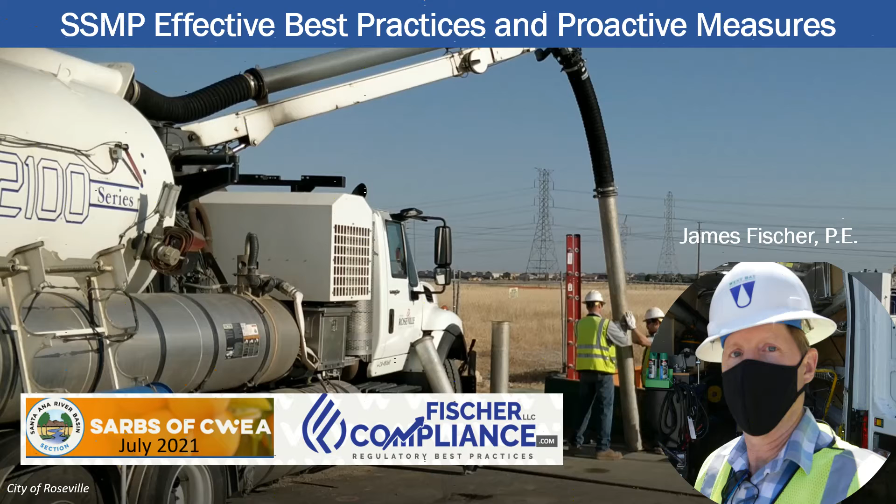Today I'm going to present to the Santa Ana River Basin—very pleased to present here—some best practices and proactive measures for SSMP and sewer program success.

Starting off with a couple of questions: How well do you think your SSMP complies with the WDRs, on a scale from 1 to 5? Something to ponder. While we're going through here, how effective do you think your SSMP is at reducing SSOs, on a scale from 0 to 5?

And last, if inspectors arrive tomorrow from the EPA, water boards, or even an NGO, how successful do you think you'd be, on a scale from 0 to 5?

These are good ones to think about during this presentation, including maybe some areas you might want to look at again later to refine your program.

Here are the main topics I'm going to discuss today in the video, starting with audits and enforcement—just a background review of some of the information the water boards is using right now to stay on top of the latest tips.

Numbers 2 and 3 are tips on evaluating effectiveness and resiliency for the proposed new staff informal draft that's out right now for the WDRs.

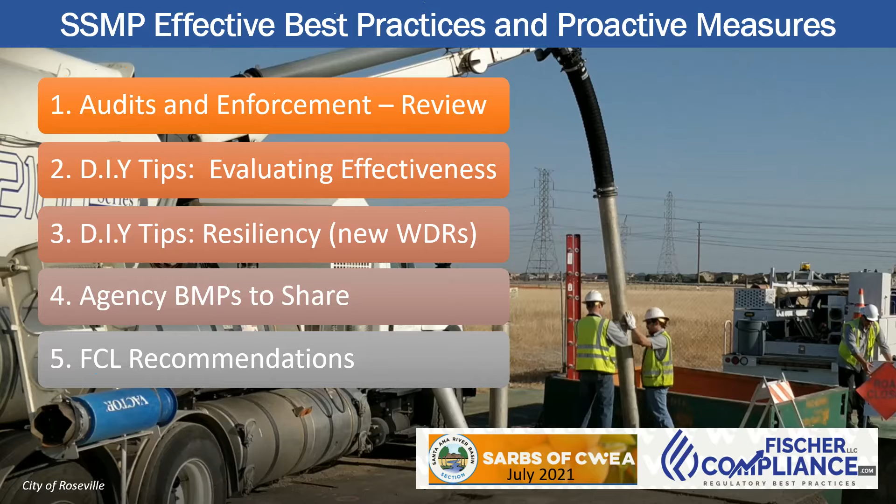Number 4, some BMPs—best management practices—to share from other agencies. And finally, at the end, recommendations on audits.

So just a background review: audits have been going around for a long time. The water boards do inspections and audits—they kind of call them the same thing, not to be confused with the SSMP internal audit that's done either by yourselves or by an outside party or another agency.

So you'll hear that term, audits and inspections, used interchangeably by the water boards.

One of the important areas that's always recommended is the water quality enforcement policy. I'm going to walk through a couple case scenarios here, but just kind of knowing the policy, knowing what the authority is for the water boards.

You definitely want to be on the left if you're going to have any enforcement—verbal warning, enforcement letter, or NOV. Those are all fine compared to the ones on the right, which are basically the formal actions.

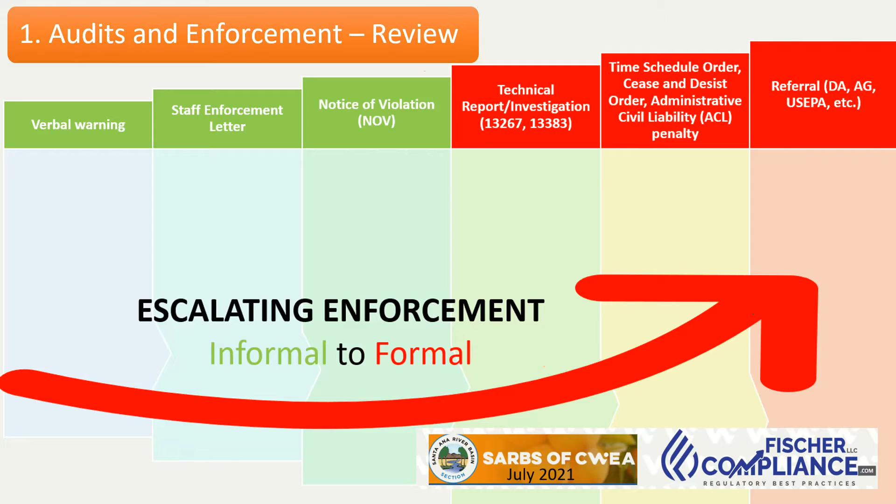I'm going to go through some of the formal actions here, the administrative civil liability actions, including the calculation or estimation for the economic benefit. This is an area that a lot of the people I've been talking with lately don't understand very well.

It's really worth going and looking at some examples. I've got a couple here in the presentation today to show some of the latest examples from Southern California and the San Diego region.

Economic benefit shall be estimated for every violation, okay? This is for every violation and any penalty action, and it's any savings or monetary gain derived from the act or omission that constitutes the violation.

So in other words, if there was a violation—was there any postponement, delay of the pump station upgrades, the treatment system that failed to do adequate control measures, such as having a good SSMP that can reduce spills? What could have and should have been done ahead of time? Were the audits not done?

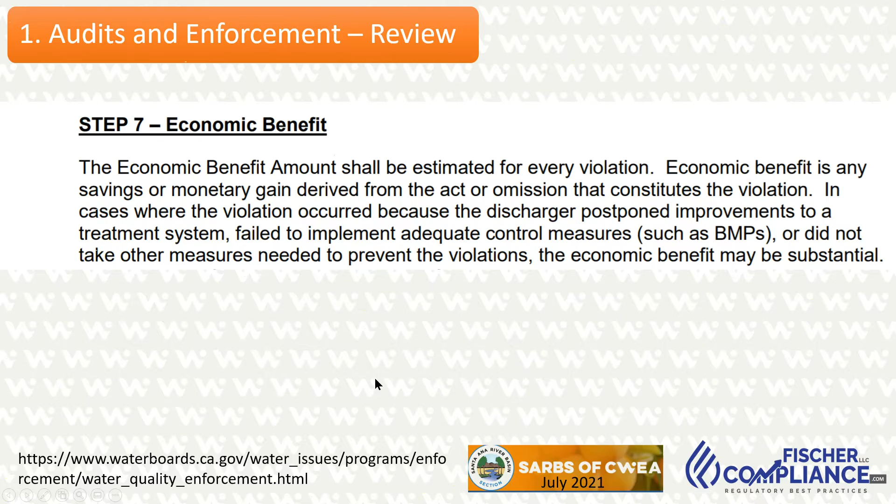Those are all things that economic benefit can be derived from, that would be entered into the calculation. So I'll show that here in a minute.

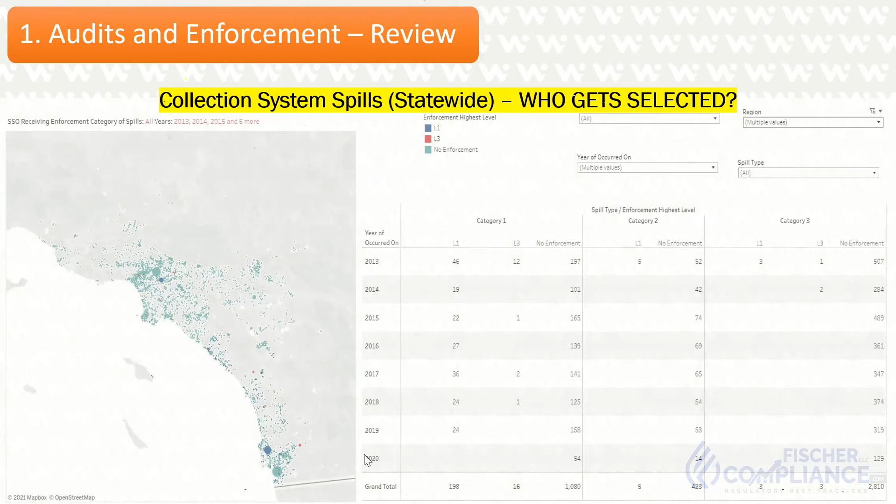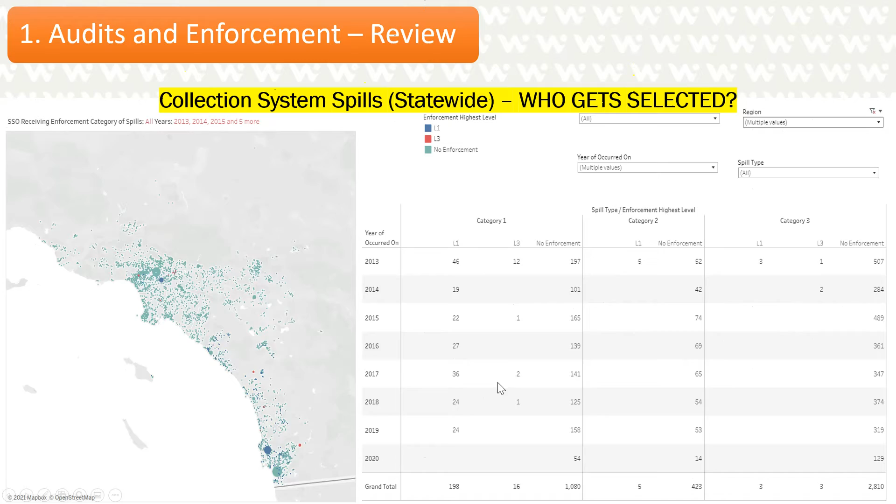And then who gets selected here? It's Southern California. This is really good to show where the historic enforcement actions have been done for the different violation categories, and a map showing where those violations are here in Southern California.

So those are just something to be aware of—there are tools the boards have developed, and there are other tools they're developing. There's also a really good recommendation here, I think, to be aware of your enforcement page in your regional board, depending upon where you are.

The San Diego board here, I'll show a couple of examples of what's posted on their page for adopted administrative civil liability, ACL, penalty actions that they've taken, starting with one from the city of Laguna Beach, $1.5 million. This is just a few weeks back.

More importantly, what's really important about these is to review the documents that are considered, what are they looking at - their questionnaire, the spill data that's in CIWQS, any kind of response to an NOV or a 13267 water quality order, a technical investigation.

Again, this is a big penalty action, but the more important thing here to look at is what could have maybe been looked at beforehand, and more importantly, how does the water boards view these actions? So economic benefit played a major role here in this enforcement action, with $257,000 added to the penalty because the prosecution team believed there was avoided cost of bypassing this force main system, which could have been done under non-emergency conditions.

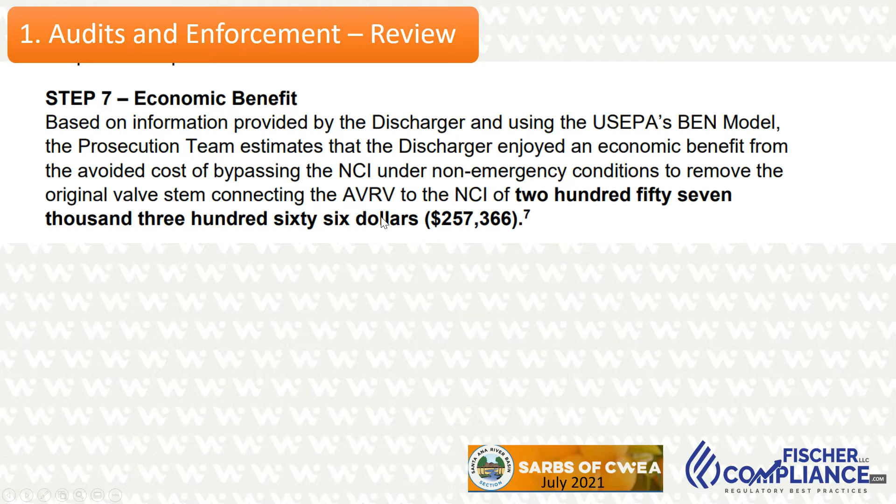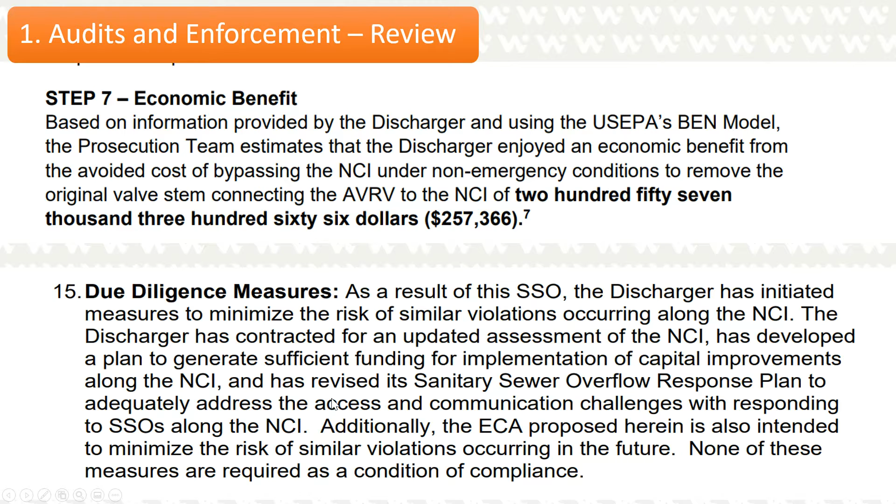The other great thing here is that the city of Laguna Beach should be really commended for initiating some major measures in the city to minimize future risks along that force main. Again, ahead of time is better, but if it's done after the fact, this needs to be pointed out, especially if it's in the SSMP and relied on for mitigating SSOs that have happened in the past.

Another one, the city of San Diego. This is another big one that happened a few years back. Again, more importantly here, not the penalty, but what the board relied on.

So something to be aware of: if your SSMP is not ready for scrutiny, it's not ready for another set of eyes, get it ready. I'll have some more tips here to show you how to do that, starting here.

The compliance reporting for notification, SSOs, are the 3-day draft, the 15-day certification, the questionnaire annual compliance, the audits - are those all being done on time? Because the reporting and all this will be looked at in fine detail during an inspection or during an enforcement action. Large SSO monitoring - is that program ready to go?

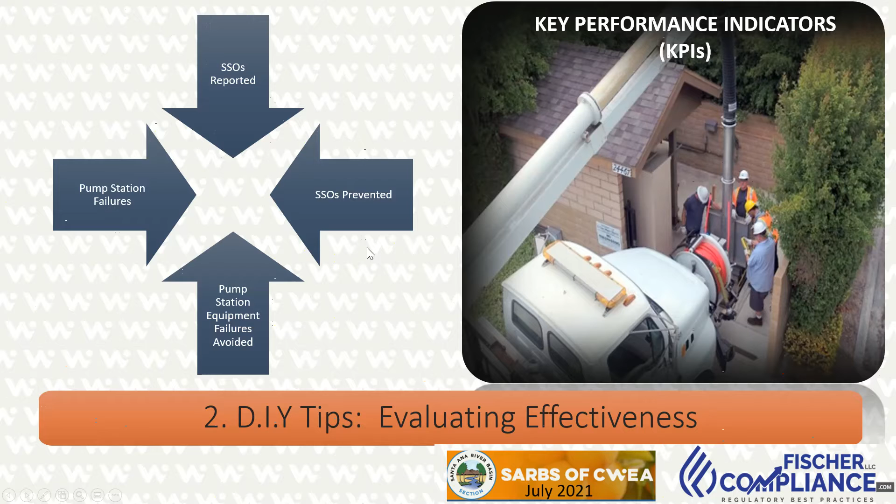Another one here, key performance indicators - these can be added into your actual SSMP. I'll show an example real quickly from the South Placer Municipal Utility District that actually does this for every one of their elements. This is D13.4, provision D13, number 4 in their SSMP.

They talk about what they're doing here in their O&M program. But you can see here they have the key performance indicators for many of these items, not every one - but are these all in place?

Are the systems in place to schedule and do the documented activities, work orders, the R&R program, the contractors being trained? Does your CIP address O&M?

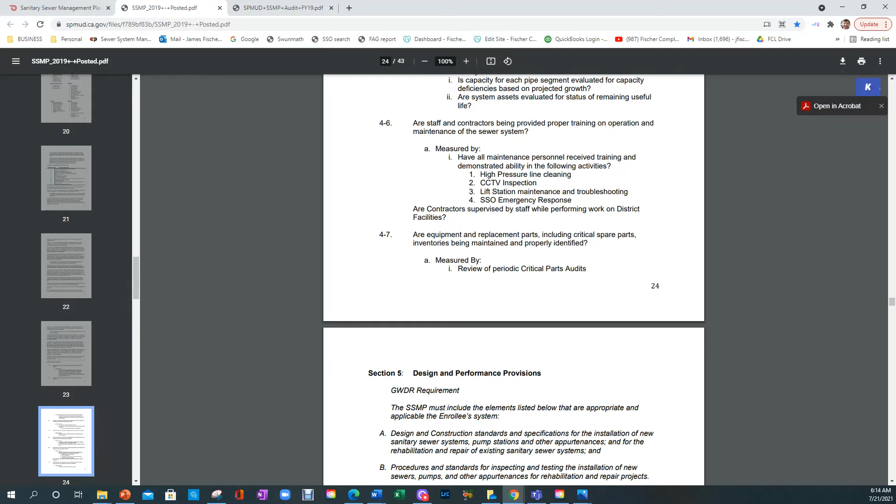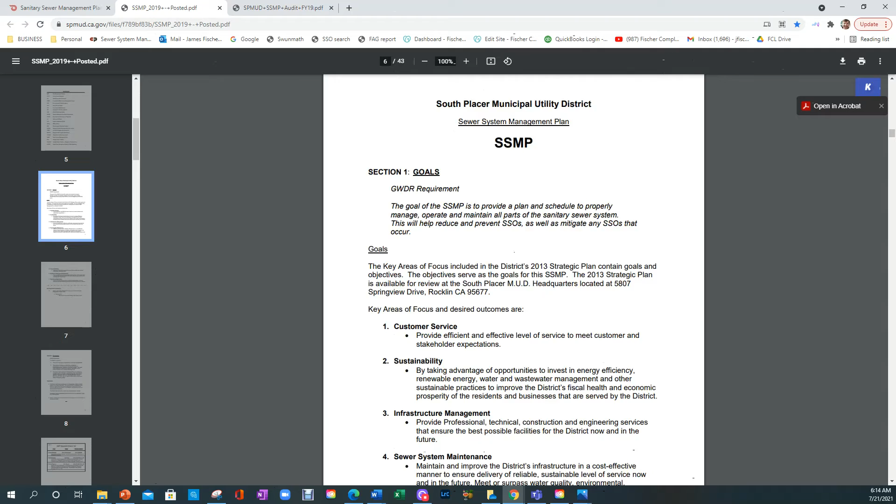They're constantly monitoring how effective they're doing for every element, even going up to the goals. I'll scroll up to the top here. Very impressive. The goals, it's easy to say, yeah, we want to prevent spills. Everybody says that, and have a good level of service, but are they really being implemented?

So the organization, again, key performance indicators shown in their plan, scroll down here, are all these things being updated? Is the chart current? So this is all great stuff to be monitoring during your cycles of your audits or your SSMP updates, so you can keep your finger on the pulse all the way through here.

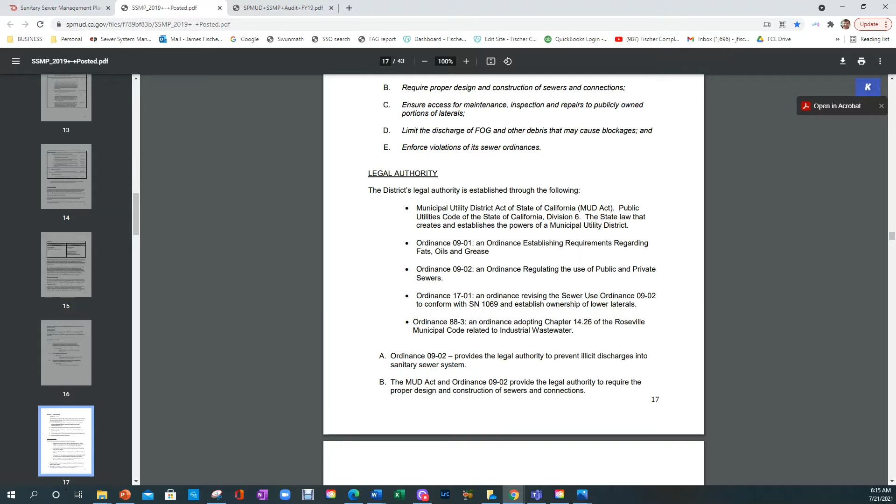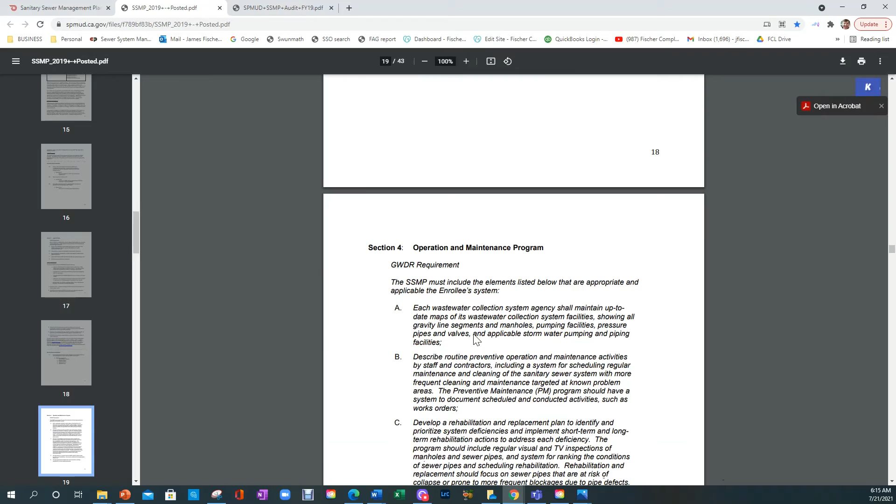And so these are really important. They're changing their ordinances. They're making pertinent ordinance reviews and updates here that are being tracked. So this is something you can definitely do for every one of the elements, something that we're recommending when we're looking at SSMPs or SSMP audits during these work activities. So just point those out real quick.

Again, these things, the boards are going to look at things like SSOs prevented, pump stations, had the grade alarms, they worked. We had the level sensors, we had flow monitoring, we had other measures, cameras, whatever, that avoided spills. These are things to definitely track if you aren't already.

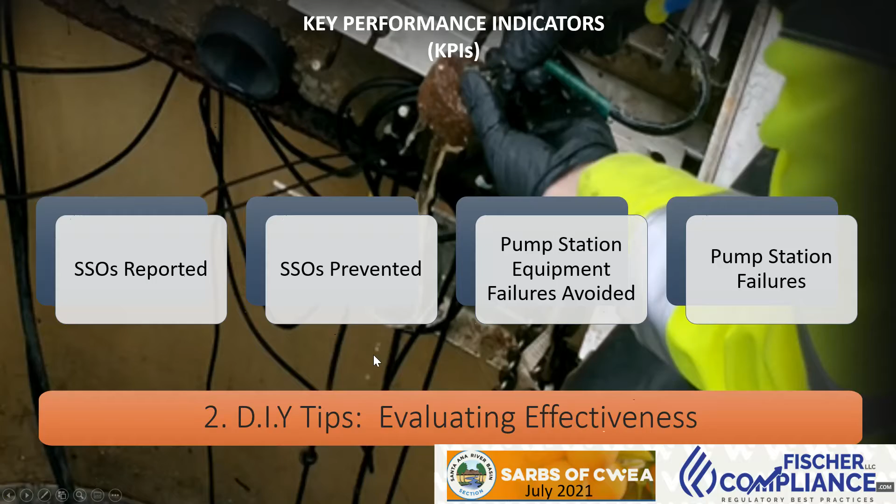I find a lot of agencies are not tracking this. They might just be tracking the failures, and that's negative. You want to see the positive things, and certainly the things highlighted here, and present that to anybody that asks, or even just have that in your SSMP.

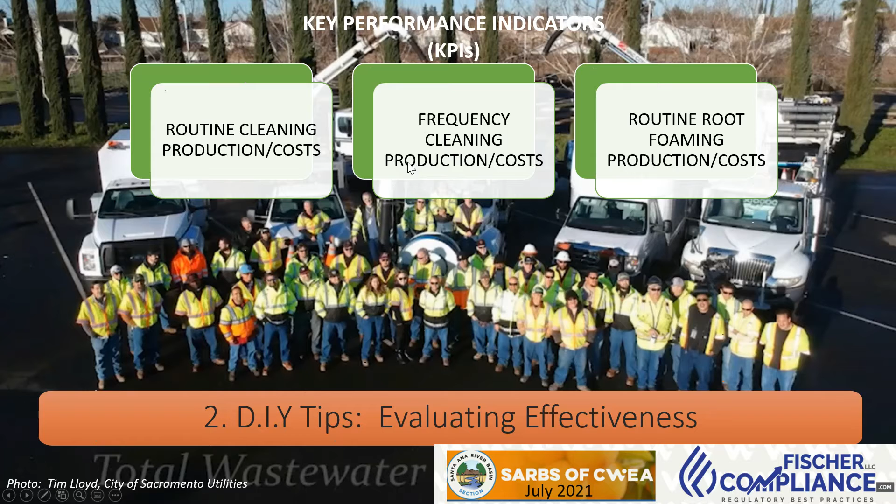Routine cleaning, your high frequency cleaning, your root foaming. Are these costs and productions, are you getting credit for these? These are definitely areas you can do for improving your effectiveness.

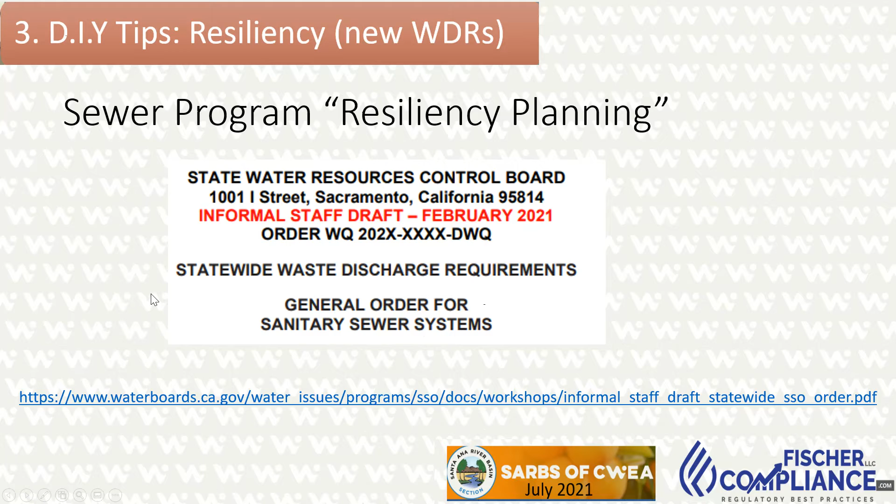Moving into some tips on resiliency, the staff informal draft has been released. I'm sure many of you have seen it. It's a huge 80-some page document. Again, this is draft, this is not in place yet, so there's a lot of comments going on right now on this. I was just going to point out a couple of things that I thought of for the presentation for SARBs today, for things related to resiliency planning.

And there's very specific things in here right now that may or may not be included. We don't know, so I'm not going to point out the ones that are in here because these are, again, not required. At the board, the State Water Board is the only one that can adopt this, and this is simply being circulated for comments. So at this point, there's been nothing formal released yet.

So I'm just going to point out resiliency measures here for reducing risk, for reducing spills, that should already be in place if you have a good program. Right here, I'll run through these pretty quickly. If you want to go back and look later, that's great.

But do you know the most likely location for your next SSOs? Are you collecting data on how you might be impacted by climate? A lot of agencies are not, but you might want to start doing that, because this is definitely an area that will be hammered on for sure in the future, and the water boards have made that very clear.

Predictive monitoring. If you have failures, or you don't even have failures, or you haven't maybe done a lot of condition assessment in your force mains or other parts of your gravity systems, are you doing any predictive monitoring? Are you checking temperatures on pumps or bearing temperatures, or motor temperatures? Any kind of predictive monitoring for oil in pumps or motors to make sure that you don't fail. Any kind of predictive monitoring, pressures, flows.

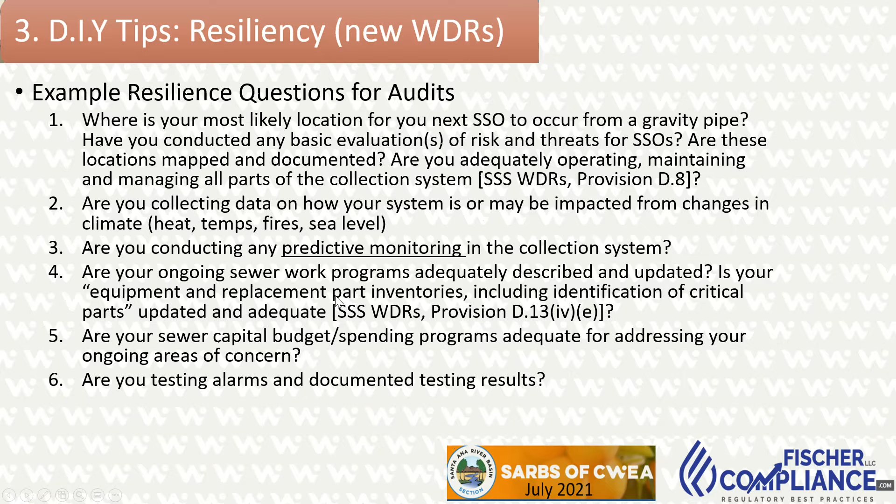Work programs are being reviewed, capital budgets, alarms are being tested. A few more: mutual assistance agreements. This is really big. I know for the regions in Southern California, are these in place? Are you having your SSMP, your audits, peer reviewed? Are they being done on time? Do you have change logs you can demonstrate that you're actually implementing, to show to inspectors?

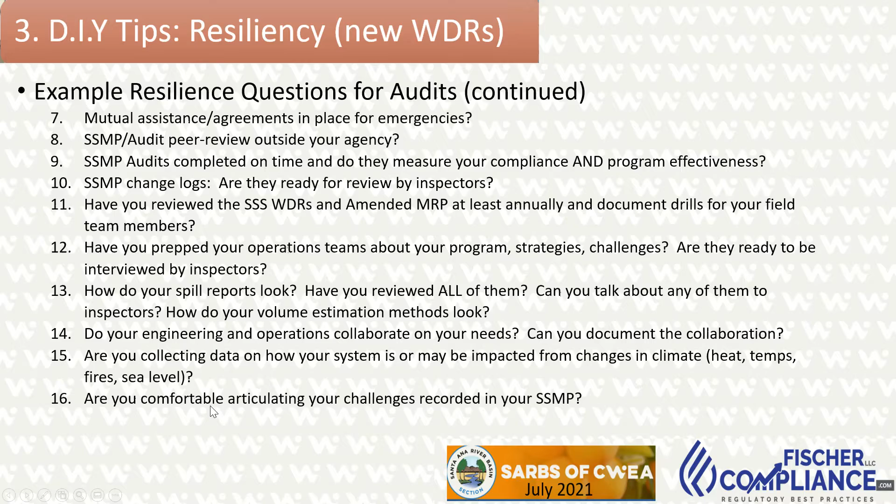Reviewing the MRP—this goes on and on, so I'm just going to quickly browse through here, maybe at a couple other ones. Are you comfortable articulating your challenges recorded in your SSMP? This is the last list here that you might want to look at later.

Do you have signage on your stations? Station monitoring, again, condition assessments, fog—these are all things that really are related to resilience. Are you participating in area of excavation, ACE or USA? These are things that the water boards and the US EPA will check and ask about your training during an audit or inspection.

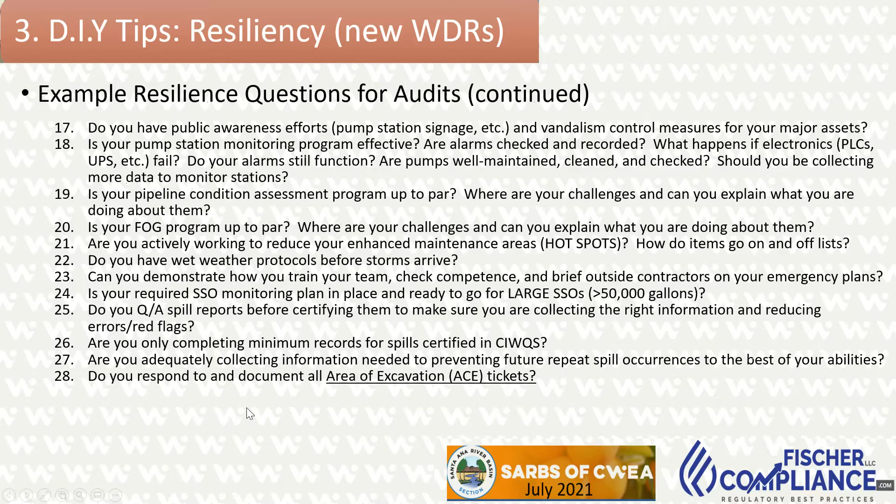Again, related to resilience, again, good do-it-yourself things. You can ask these questions, look at your own program yourself, or bring in outside help. There's definitely advantages to that, but there's a lot of this that can be done internally, such as those.

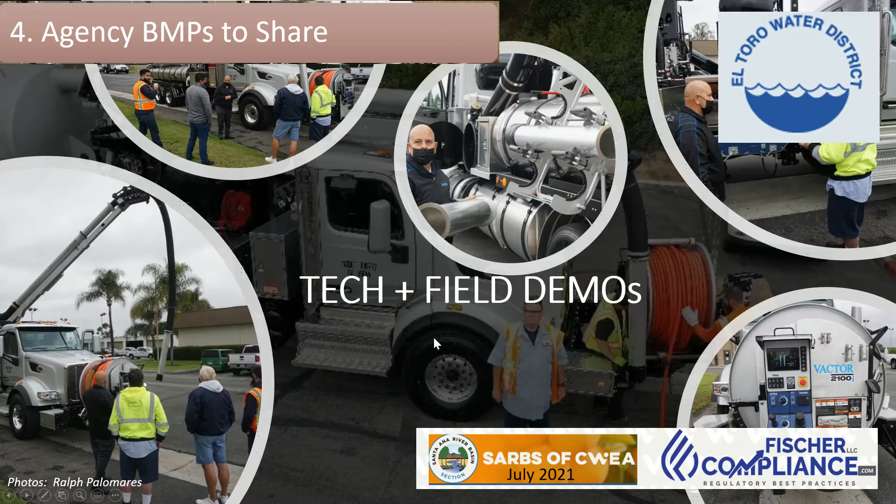Now I'll shift into some of the things, the best management practices to share. Ralph Palomares at the El Toro Water District sent me some great photos, a great demonstration of their fog program here. They had a presentation they did a while back. I just wanted to point out great things like this to really kind of just browse through and show their BMPs, proper cleaning, proper scraping the walls.

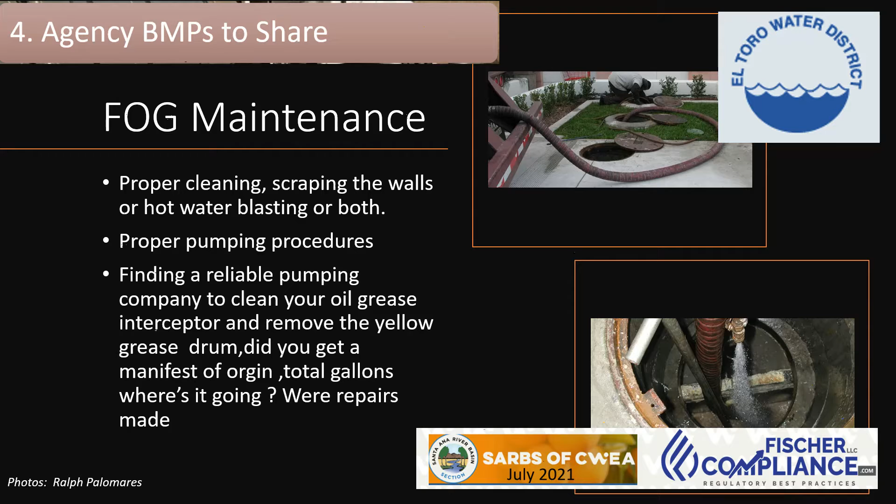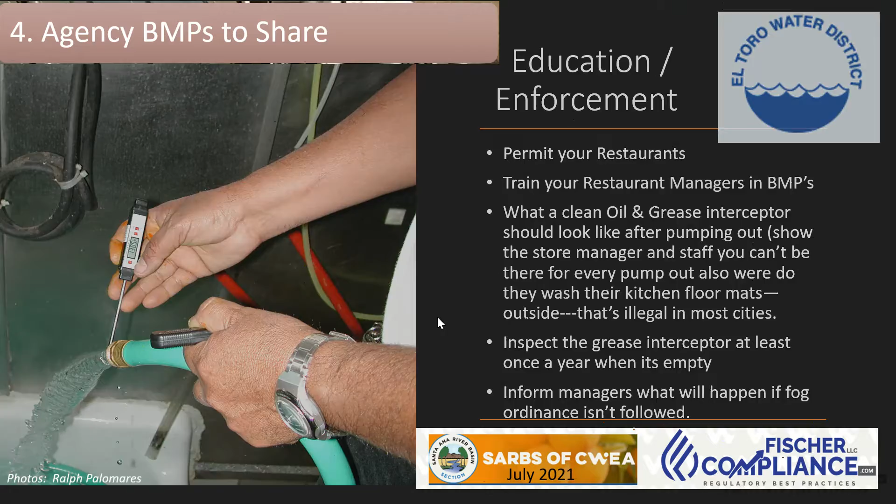They're looking at, especially with COVID-19 starting back up, restaurants. Ralph told me there's some big challenges here, so I recommend just kind of maybe looking at this later if you want to. On education and enforcement, they have a great program—it's a well-oiled machine clearly there. So they're a great reference. Many of you probably already know; if you don't, you might want to contact them.

This was pretty cool, again, as a demonstration of effort between Irvine Ranch and El Toro. Again, that mutual aid—not just saying we have an agreement, but actually, look, we're working together. We have a safety program, we coordinate our training, we're doing these things sort of consistently across both agencies. This is a really good, great evidence card to hold up in your pocket if you have an audit or inspection.

Or a question by the board—even have them out for a tour to show them that you get the fact that you can do more with more resources, and having that mutual aid is something that's in place. So pretty cool, just something to point out here.

I'm going to end the presentation with some of the recommendations I'm making here. I'm definitely tooling the audits, the SSMP updates, or any of the help I'm doing to be unique for your regional board programs, since I worked for the boards for so long and am familiar with so many of the intricacies of the regions, their priorities, their enforcement prioritization, how they think. I'm definitely open to helping you strategically develop and tool your program to their needs and what they're likely to check for in their regions.

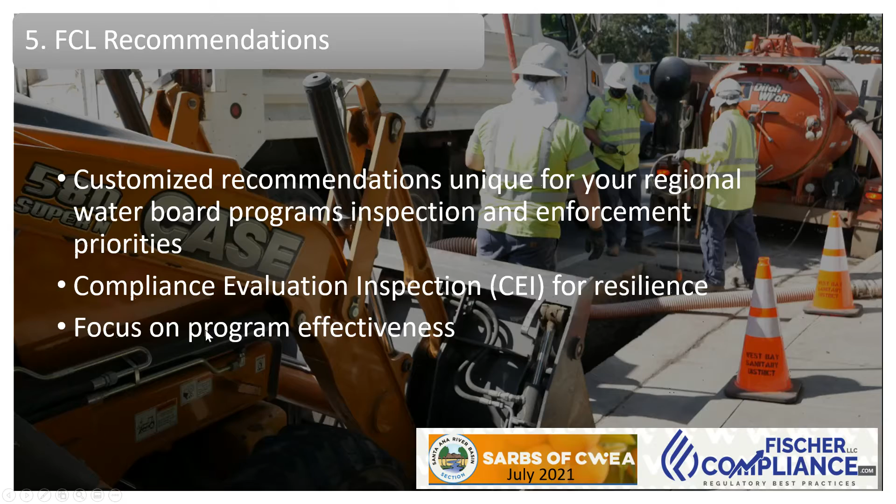A compliance evaluation inspection is definitely something I'm recommending for added resilience and focusing on effectiveness. I think it's an area of really doing a complete review, not just those 11 elements in isolation, but looking at everything else—your records, your compliance with the MRP, with the order, and all those other areas. The implementation is very important.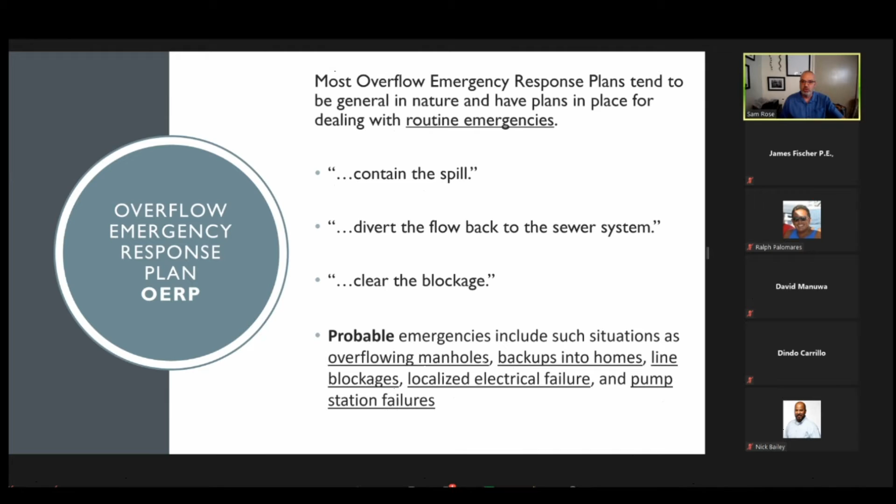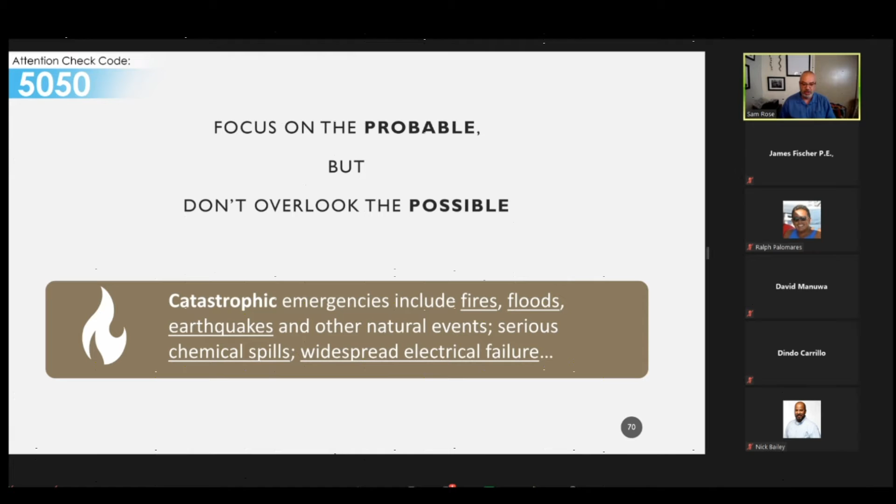Localized electric failures, maybe at pump stations, backups into homes, line blockages and pump failures, and so forth—these are the routine, and I'm certain all of these are addressed in our overflow emergency response plans. So while we focus on the probable, we want to make sure we're not overlooking the possible. The possible are some bigger events like floods, fires, earthquakes, and regional electric power failures and so forth.

These are some of the possible, but not the everyday events. And we've had enough reminders through the years that these things happen.

2019 wasn't that long ago. We had the Ridgecrest earthquake in Southern California. We're all aware of the wildfires throughout the state that are continuing to happen. And related to the wildfires are these public safety power shutdowns that some of the electric companies are doing. So with fairly short notice, a matter of a couple of days, we're being asked to run our systems without electricity for up to 72 hours.

So how do we get there? How do we put our attention on the possible after we've already dealt with the probable? So one way to do this are vulnerability assessments. And so what are my system's vulnerabilities? Where are they? This is a good drill you can do in-house with all of your staff, all your field staff. You can do a brainstorming session on some of the assets that you address priorities like the likelihood of failure and the consequence of failure. And in this case, the failure would be an SSO.

And then as you work through the process, then you develop, well, what's my plan to either solve this problem, so I can take care of it, or what are my mitigation measures so that I could address it and reduce the severity of the event. And then finally, when you devise a plan and so forth, we don't often get times to test them until the event comes, and that's not the best time to be figuring out how to deal with something. So as we develop these plans, we have to develop a process that we have some high level of confidence that our new plan will work.

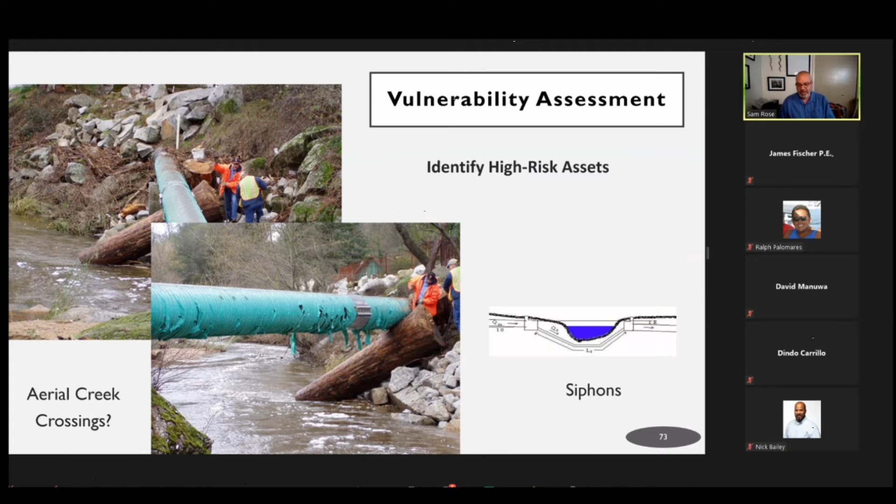So here's just one example of this in my system, and this is clearly a high-risk asset for us. It's an above-grade creek crossing. As you can see, several things come down the creek. This pipe actually goes underwater during big storm events and so forth. And then when you add, in this case, the log that's up against the pipe, it just applies that much more pressure to the pipe. So this was an area of concern for us, and again, an example of a vulnerability in our system.

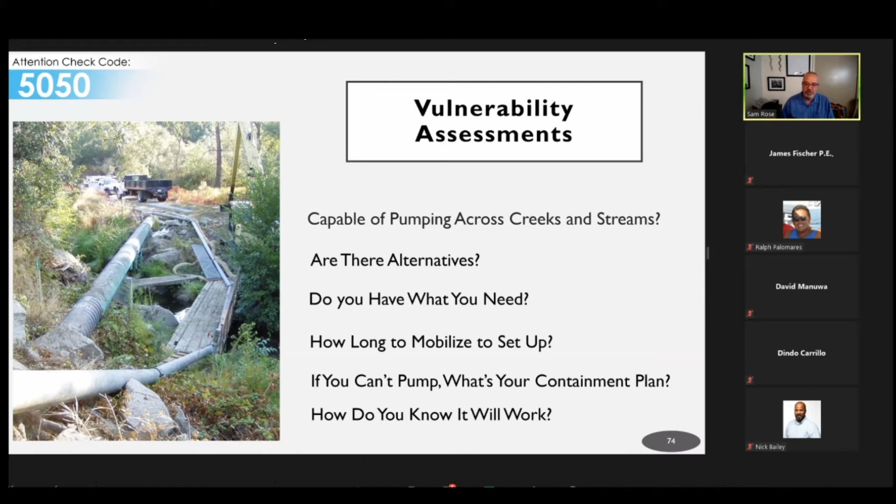And so when you have any aerial creek crossing, or maybe even an inverted siphon that crosses a creek, are you capable, if you had to, can you set up a bypass across the creek? Or are there alternatives where maybe you don't need a bypass, but maybe you can shuttle the sewer with a pumper truck, or there's an alternate route? Do you have what you need to set up a bypass? Do you know how long it's going to take just to mobilize? These things don't happen overnight. And then if you don't have the means to bypass, how are you going to mitigate the situation? Do you have a containment plan and so forth? And then again, how do you know it can work?

So I apologize, this thing's going automatically on me here, so I'll do the best I can.

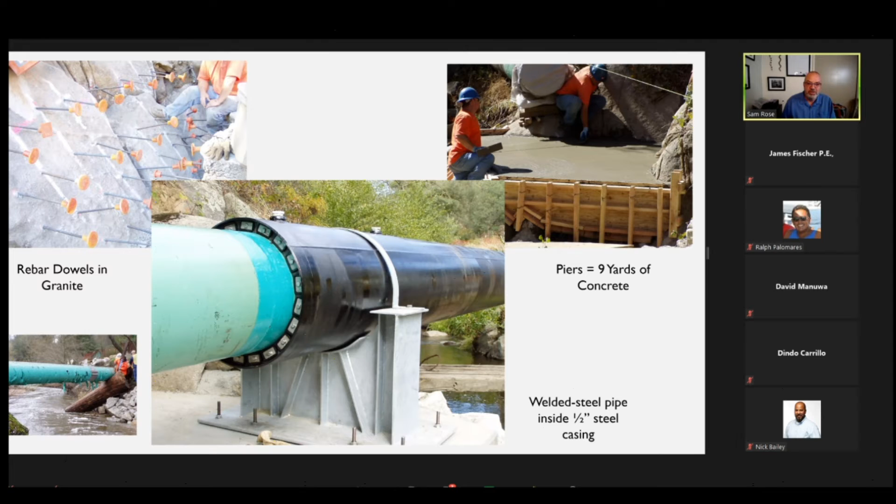So Jim talked about the economic advantage. This is that same creek crossing, and we knew we had an issue, and we know we can't go winter after winter with this thing going underwater and who knows what pressing up against it. And if we lose that pipe, it's a 24-inch trunk line, so it carries a fair amount of sewer. So we solved our problem. On the left here, we drilled into the granite rock and we set rebar. We poured, this was to hold the pier in place. We poured 2 piers on each side of the creek, and both of them had about 9 yards of concrete.

And then you see our final product here, where we have welded steel pipe inside a host pipe that's 1/2-inch walls on the steel casing host pipe. And then this has a CIPP liner inside it, just because the steel pipe didn't have a coating in there. But we did this. This was about a $260,000 job. And as Jim described earlier, had we not done something like this, and we did have a catastrophic failure and lost our pipe, the water board may have tried to play the economic advantage option that they have, and we could have been fined that in addition to the other fines that would be coming our way.

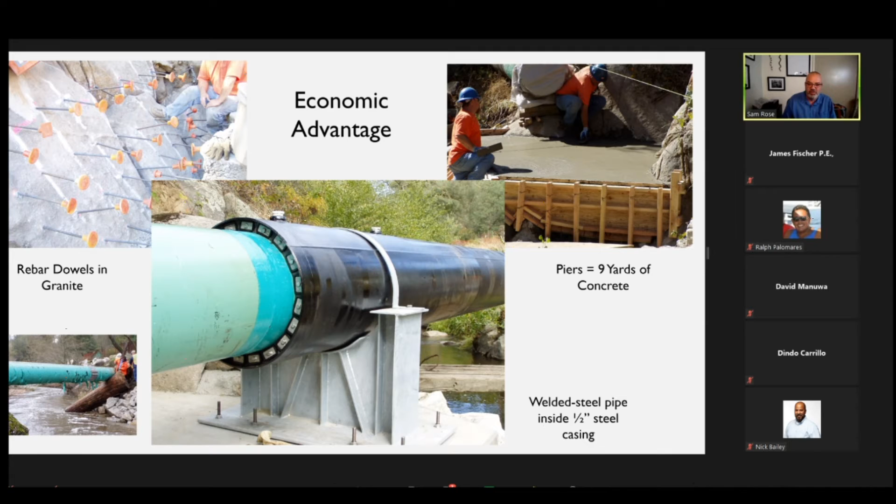So we have other areas that could be difficult too. How many of you folks have pipes that cross under a freeway or just under a real busy roadway that it's not real practical to be able to bypass across? Railroad tracks are another example of it. We had an opportunity here. This is a 36-inch trunk line going underneath Interstate 80, and we needed to bypass this. This would have been a planned bypass.

But we were trying to figure out how to do it. And what we found was a Caltrans culvert about 150 feet away from where we were crossing. So we contacted Caltrans, and we got permission to use their culvert. We set a Hydrovac up where the red X is. We ran it through the pipe, attached our lay flat hose to the nozzle and dragged it through their culvert. And we set up our bypass and were able to do our work.

So after that, we took it a step further, and we contacted Caltrans and asked them for their storm drain maps, which they were happy to give us. And we found only one other place along Interstate 80 where there was a culvert in close enough proximity that, if we had to, we could bypass a pipe. So we tucked that away, and we have that information available with us.

The Union Pacific Railroad was a little bit different story. They were real nice about it, but they had no way to cooperate with us. They absolutely didn't want anything on their tracks, not even lay flat hose in an emergency. So what we did is we said, okay, we can't come up with a plan for that, but we're going to document our efforts: we spoke with the railroad, this is what we talked about, this was the response we got.

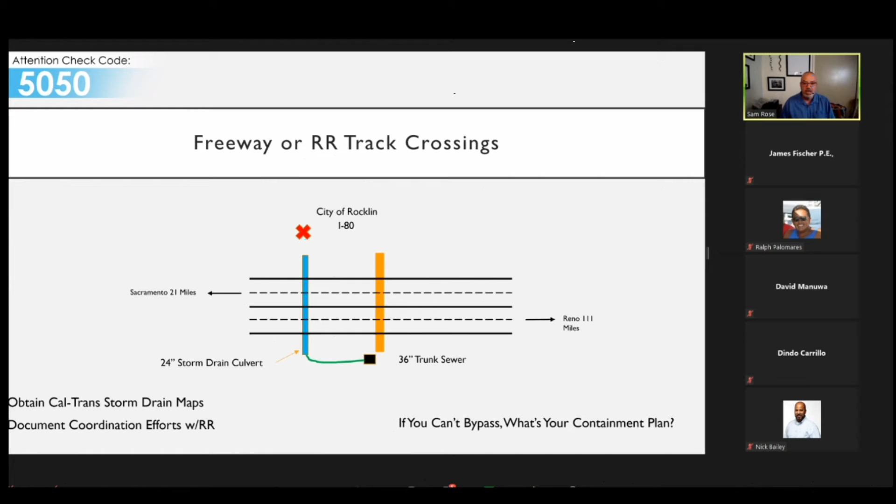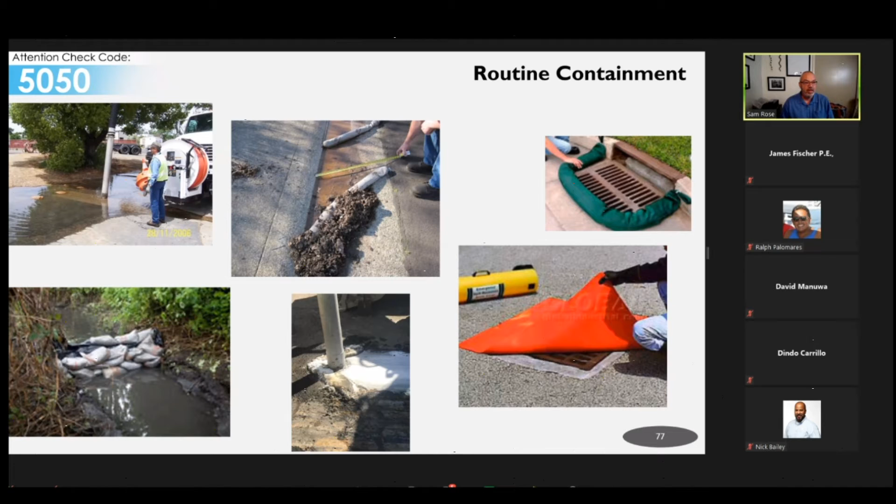So you're all familiar with routine containment. I'm not showing you anything here that you haven't already seen. These are the ones that are generally in our OERPs. But here's another situation. I'm making these numbers up, but here's a 500,000 gallon a day spill rate, which equates to 347 gallons per minute. And just for effect, in 30 minutes you will have spilled over 10,000 gallons, okay?

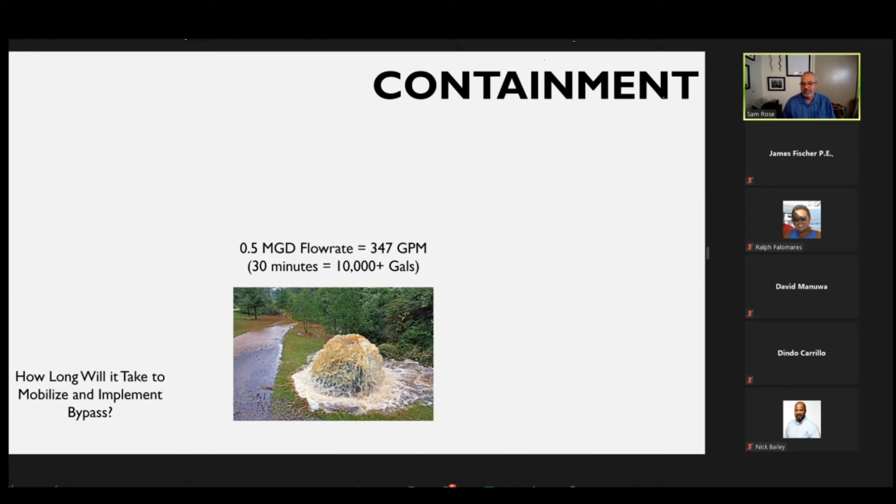So again, you become aware of this problem, and it's been spilling for however long it's been spilling. So how long will it take to mobilize your equipment? First, to try to clear the blockage, but then secondly, if need be, you're probably at the same time mobilizing your bypass equipment. You know what kind of time that takes. Have you given any thought to how you might contain a really large spill like this?

I know of a few agencies, including mine, that are ready to just start mobilizing soil, with 811 in the back of our heads for the location request. Sometimes in emergencies, you have to do what you have to do. And so some agencies either haul dirt and start mounding it, or some will scrape dirt and start creating a berm and so forth. But at least they have a plan, and it's in place, and it's better than nothing.

And another interesting thing our agency did: we had a trunk line that was 2 million gallons a day, and it followed right along the creek, as a lot of trunk lines do. And we didn't like that a spill would go right out of the manhole into the creek, and it would be pretty significant if it happened. So we did a rim elevation study, and we found the most likely places, the lowest manholes that are going to spill if parts of this line become plugged.

And once we did this, we got a little bit lucky because we found an opportunity where if we sealed off 2 manholes, we doweled the cone, poured heavy concrete collars around the frame and cover, adhered it to the cone, and put a gasketed, no vent, bolt down cover on it. And by the way, we've never had to put this into play, but what it did for us is the next spill point was not in the unimproved areas in the boondocks out in the field along the creek.

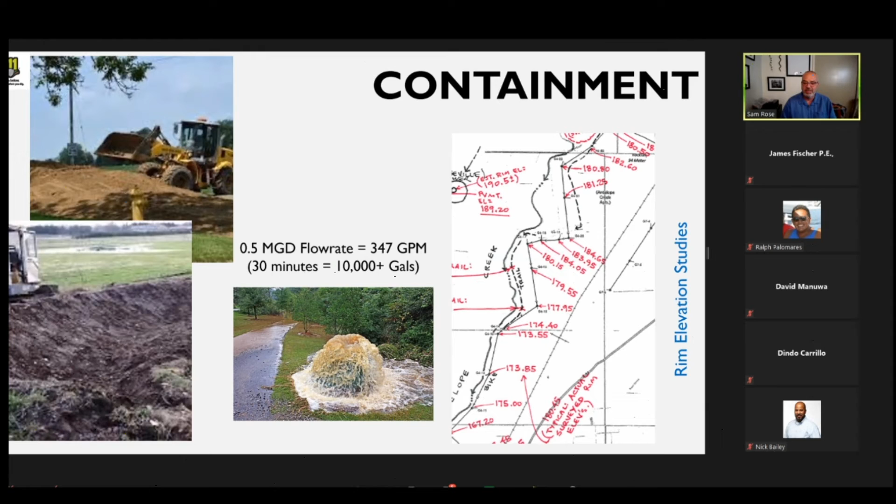It was actually on a paved road that led to an apartment complex. So it would have been easier to implement containment and a little bit more time before it went into the creek, but also much more visible and much more likely that someone would see it and report it to us sooner. So just again, food for thought.

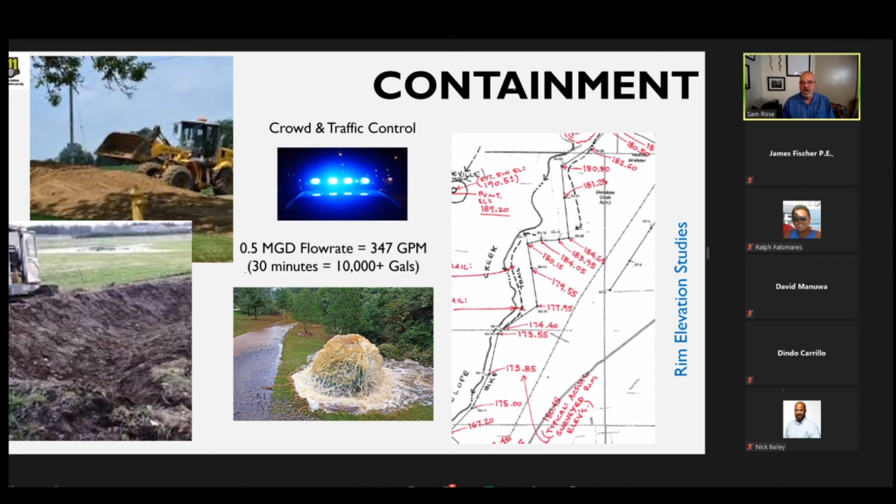And then when you have a spill of this magnitude and it's in an improved area on Main Street, for instance, and you all recognize that the SSMP requires that we have the means for crowd control and traffic control, and we have to protect the environment and public health. And so one suggestion is to coordinate with your police and fire departments. They can secure an intersection or a section of road very quickly because their blue lights and red lights get a lot of attention quickly. And they can kind of hold things off until you can mobilize and get your forces out there and set up your own traffic control.

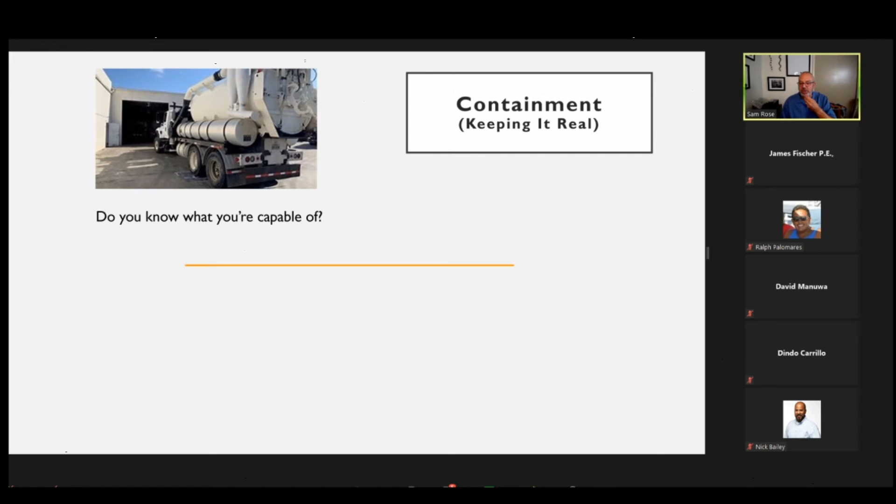So another thing, a lot of agencies use their hydrovacs. They'll mobilize a hydrovac, and if they have a manhole that's overflowing, they might put the vacuum in there and start retrieving some of the sewage and try to keep it down below the rim. We all use hydrovacs to help us with containment and retrieving sewer after the fact. But what do we really know about our hydrovacs? So if you have a 12-yard hydrovac debris tank, it equates to about 2,400 gallons. Okay, now I don't think you can fill the whole thing up. You're going to have some limits there, but just for conversation's sake.

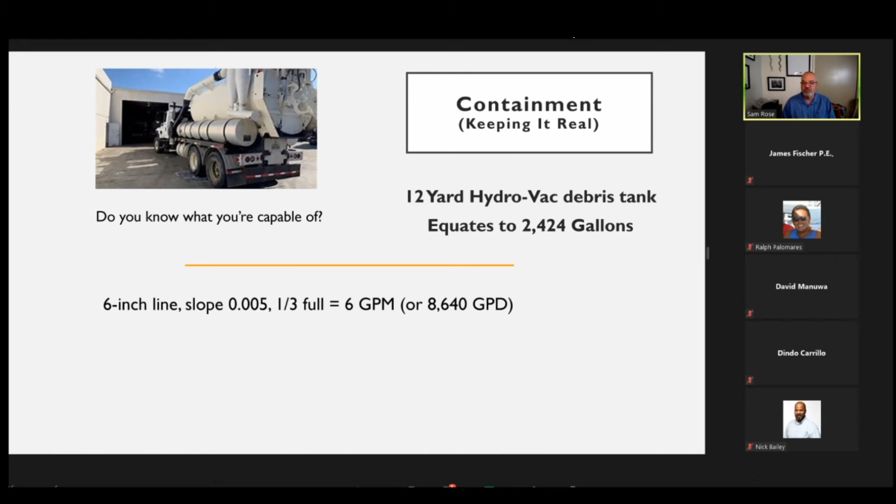So a 6-inch line that's at minimum slope running a third full is 6 gallons per minute. That 12-yard hydrovac, you'll be able to hold sewer for 6 hours and 44 minutes. A 10-inch line, minimum slope running half full, 32 gallons a minute. That'll help you for about an hour and 16 minutes. A 15-inch line, now you're just down to 15 minutes. And then when you get bigger, it's kind of like forget about it. So again, we all use these, we all know about them, but do we really know the limits? And do we have a trigger in our OERPs to tell the responders, you can use it to this point, and then after that, you have to bail and go to something else.

How many folks have excessively deep manholes? We all, as a general rule, think we can get a suction lift with a positive displacement pump of 27 feet. But the truth of the matter is it's actually something less than that. And you need to know what that is. Whether it's 20 or 25 is going to be different based on your equipment and circumstance and so forth.

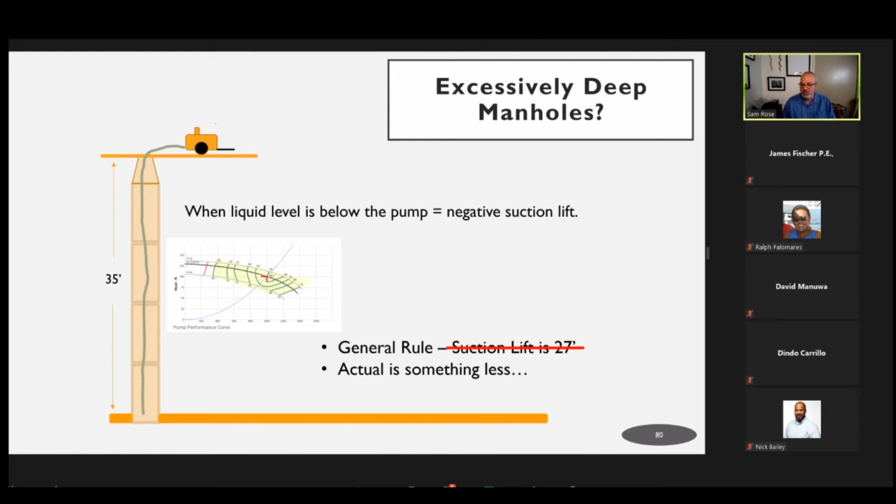And just another note about our pumps. We always look at the pump curve and we see what the pump is capable of. But my experience says focus on the sweet spot on that curve. Don't expect to get the max out of your pump, especially if it's been around for a while. These curves are built on almost like laboratory classroom environments and their ideal situations. And so you really should count on the sweet spot on the curve and not the max.

And so have you identified manholes that might be problematic in this way? Do you even have enough suction hose to reach down that far if you have, in my example, a 35-foot deep manhole and so forth? Or can you move to maybe the next manhole down where it's actually shallower and your pump will work in the way that you expect it to?

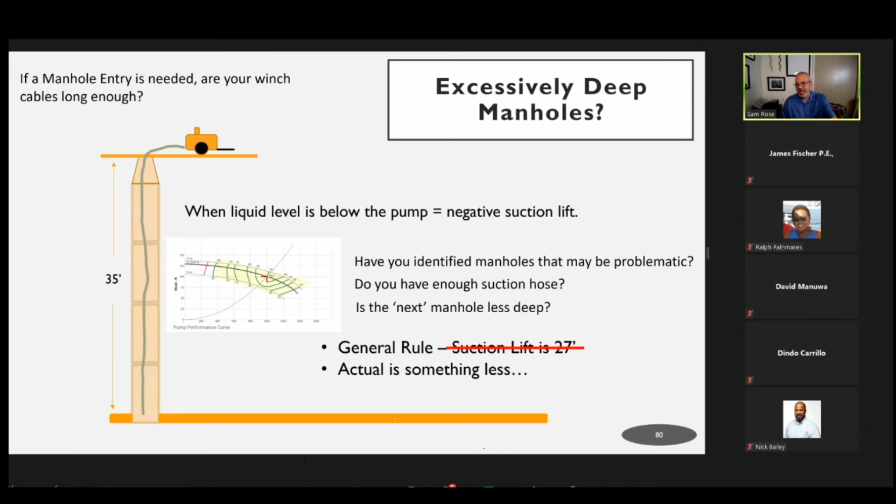And just a quick side note, because my agency found out after the fact, we had a new subdivision in. We had some manholes that were 35 feet deep. Turns out our winch cables for our confined space equipment, they were only 30 feet long. And so as soon as we discovered that, of course, we got new ones and longer ones and so forth. But again, something to think about, something to evaluate. Your GIS programs will help you a lot with where are your deep manholes.

And here's the solution to the deep manhole problem. It's to use a submersible pump. With a submersible pump, the liquid level's above the pump, and so that has a positive suction lift, and it can push sewer a lot higher than when you have the negative suction lift.

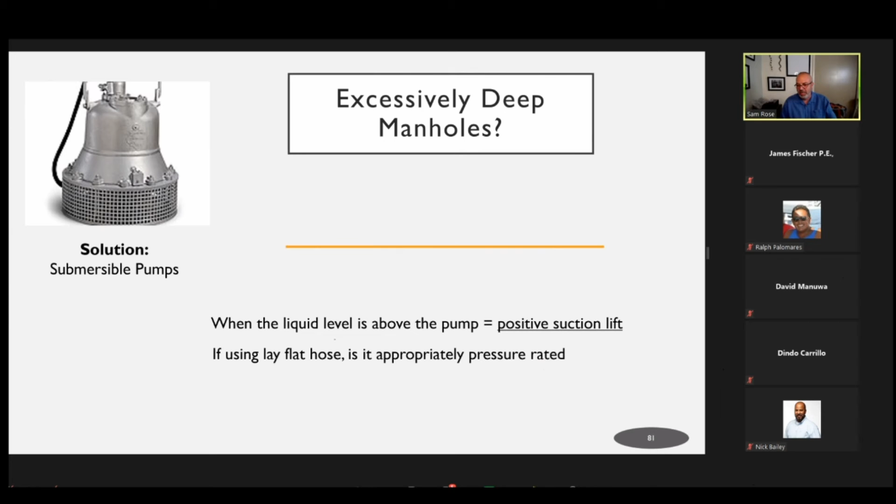Another caveat here too: if you're using lay flat hose, it has different pressure ratings. If you're pumping over a hill that's 100 feet tall, there's 43 pounds of pressure on that hose before you even turn the pump on. When you add the friction factor on lay flat hose, and there's a lot, your pressure rating goes up quite a bit. I've been around one instance where the lay flat hose actually split and burst because we were applying more pressure than we should have.

There are other reasons besides a careening vehicle that your control panel might fail you. You could have an electrical fire. Maybe you're in a wooded area and a tree fell, or whatever the case might be. We have to be prepared for that.

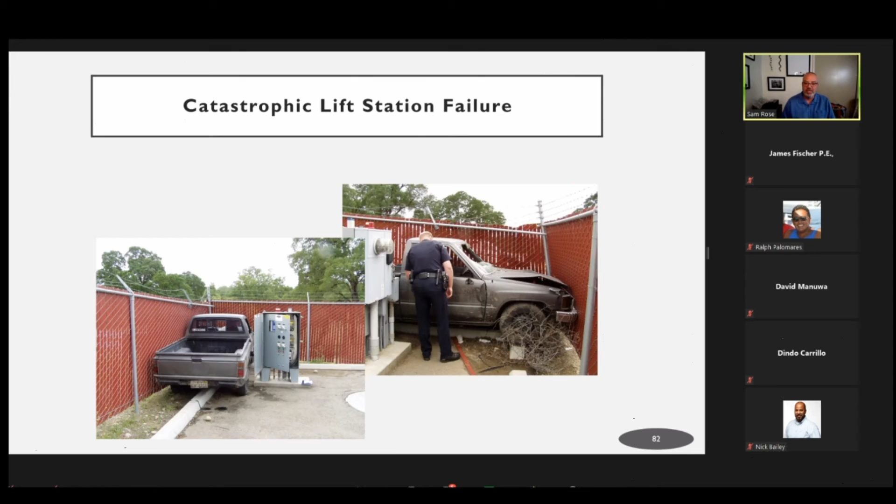Using force main bypass manifolds is a good solution to that. You can put your suction hose in the wet well, quick connect your discharge hose to the bypass manifold, and now you're using the force main to decant your wet well.

Have you evaluated your pump stations to see if it's even feasible to set up a traditional bypass plan to take care of an instance like we just described? Or is it a small enough station that you can use your hydrovacs to decant and shuttle and so forth?

Sorry, I can't turn these things off, so I'm trying to do this as best I can. Do you know where your spill point is? Do you know where the low spot is? Do you know where the sewage is going to settle in? What's your containment plan if you can't get a bypass going, and so forth?

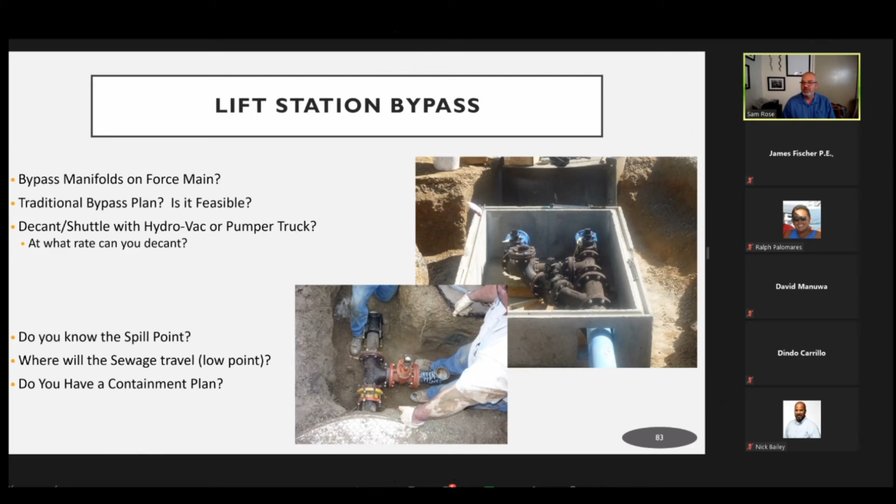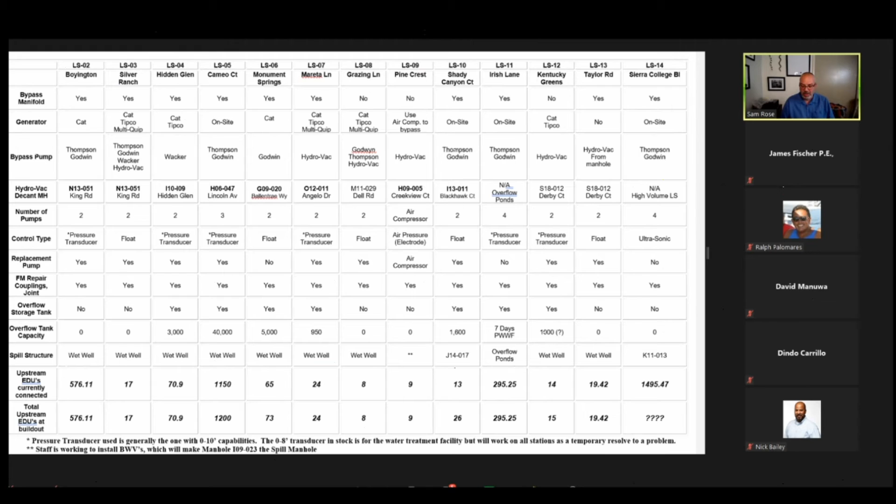Does this station have a bypass manifold, yes or no? Does it have an on-site generator, or does it need one of our two portable generators? And if it's a portable, which one, or both, which ones work at that station? If you have a bypass pump, we tell people exactly which pumps work at your station. If you're going to shuttle sewage in your hydrovac to decant, where's the decant manhole? We even keep a map of the decant manhole posted at the stations so someone can see right where to go. Time is of the essence when we're responding to an SSO, so quick reference guides are really valuable in that sense.

So we talked about the regional power failure. When we heard that we could be losing power at our pump stations or in our agency's service area, it got our attention. Tabletop exercises are really good for planning, problem solving, and so forth.

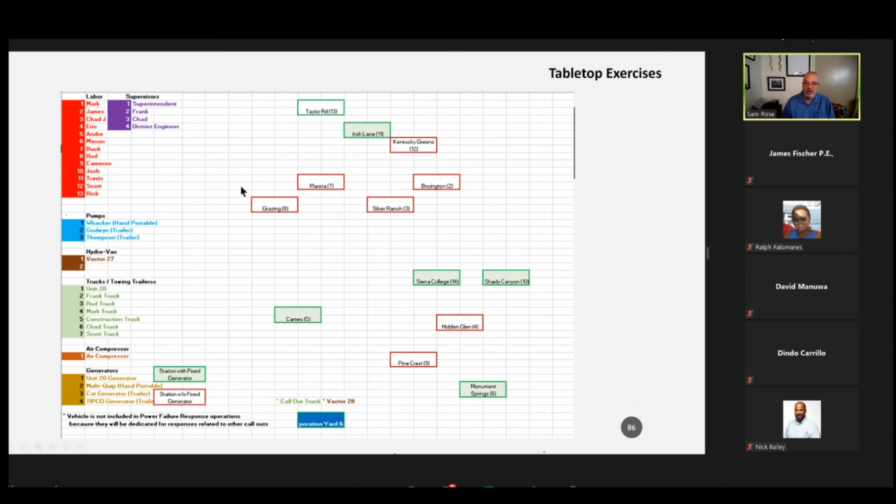This was an all-hands exercise. We got in a group, talked it all out, and figured out how we were going to deploy all of our resources so that we could keep everything up and running, all of our pump stations up and running, for potentially 72 hours. This is kind of what it looked like.

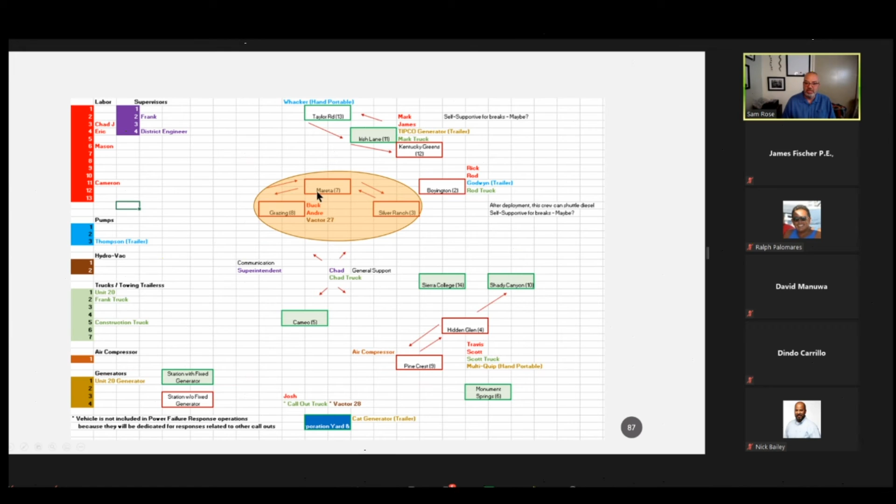I want to just really quickly put your attention here, I'll come back to this later, but we decided these are small pump stations and we could use a two-person crew and a hydrovac to shuttle and decant the sewage and keep those pump stations up and running, because our other equipment was going to be used elsewhere. I'll come back to that. During the tabletop exercise, a lot of questions came up.

Well, if there's no power, can we even get fuel at our local cardlock station? And once we had fuel, how would we shuttle that fuel to remote sites to keep our trailered equipment up and running? And then how would we manage our personnel? Would we do three 8-hour shifts or two 12-hour shifts? How would we provide for meal breaks?

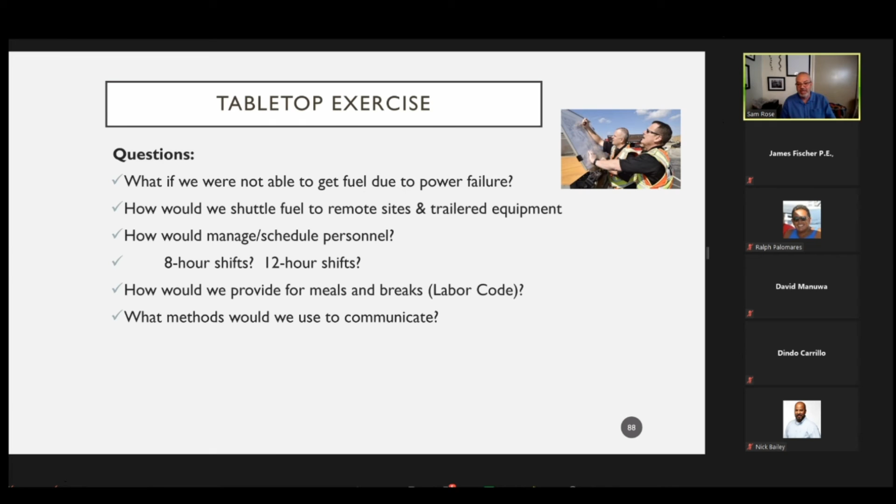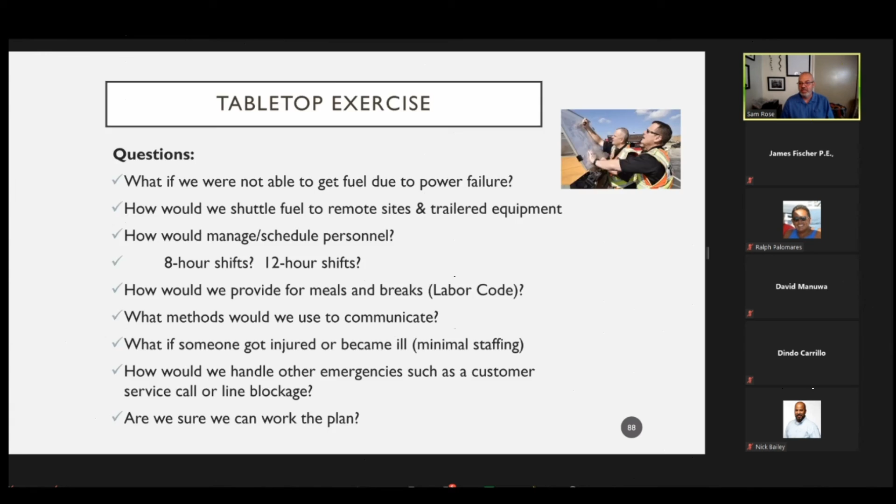We have everybody out there all around the clock. What methods would we use to communicate? The radio towers could be down, the cell towers could be down. What if we're already minimum staff? What if somebody became injured? What happened if we actually had a blockage on a main line or something and we had to respond? And then again, how do we know that our plan that we just developed in the classroom is going to work?

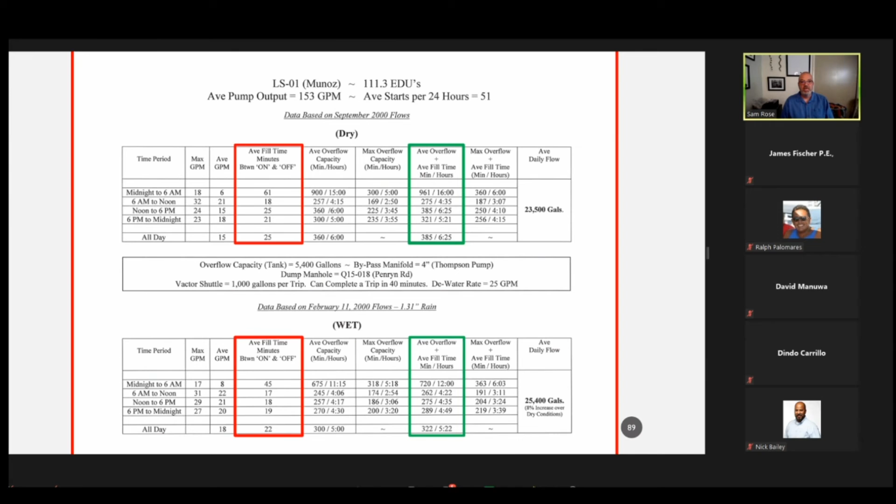So planning comes with things such as this. This is something we did before we had SCADA, but it's much easier once you have SCADA. Do you know what the retention times are in your pump stations between the on and off float? And then if you want to take up some of your safety factor, what's the retention time if you include your overflow emergency storage?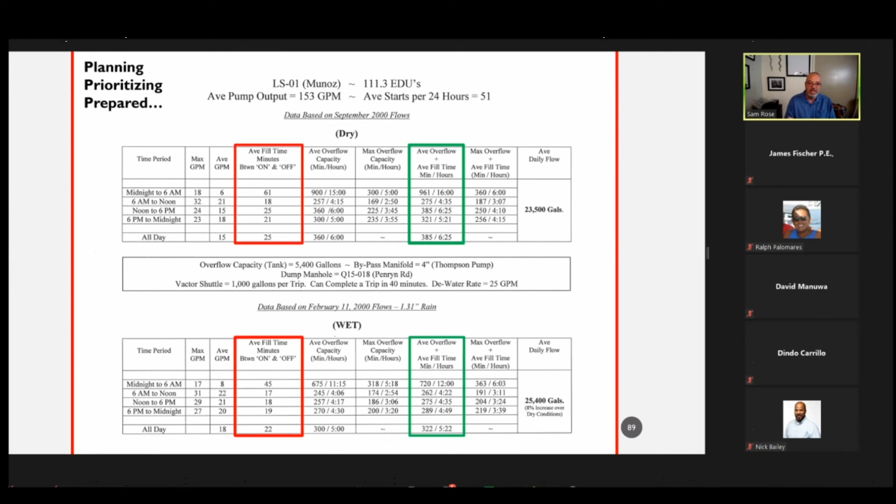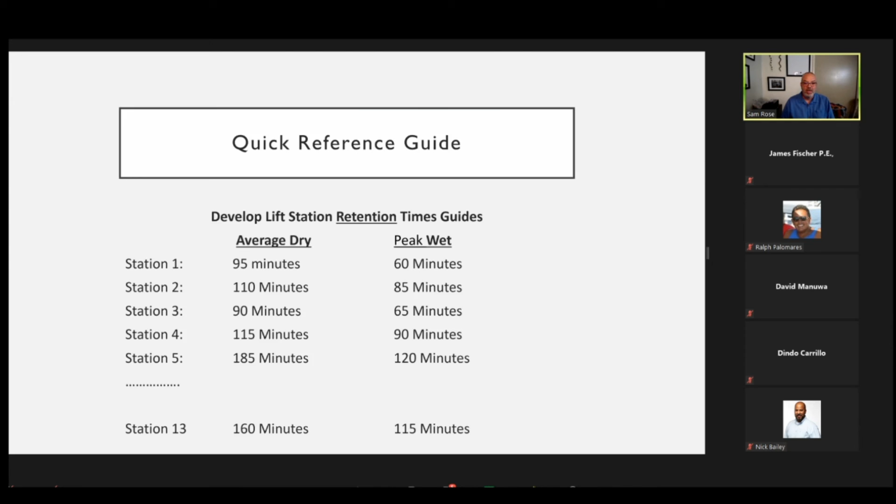These are good when you're planning, when you're prioritizing, you want to be prepared. Which stations need the most attention from this standpoint? In other words, which ones are going to fill up the fastest, and which ones can we let rest for a while? And then again, quick reference guide—this is all available, it's tabbed in the OERP. If you have that question and you want to know about it, you just go do a quick check and you look at it.

So another thing is we're shuttling from pump station to pump station. These are travel times from our corporation yard to each one of our pump stations. The longest travel time from the yard to a station is 16 minutes. But then from station to station, we have two that are only 17 minutes, but those are our longest travel times. We have some as short as 4 minutes and 2 minutes and so forth. But again, when you're planning, you want to have realistic goals. You want to know what you're up against. You only have to do this once, and now you have this information available to you, and it'll help you make better decisions when you're under pressure when the SSO is happening.

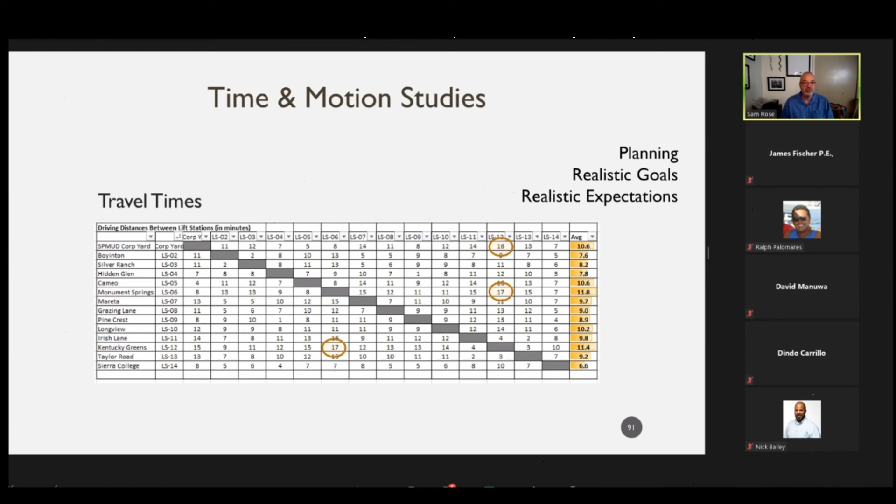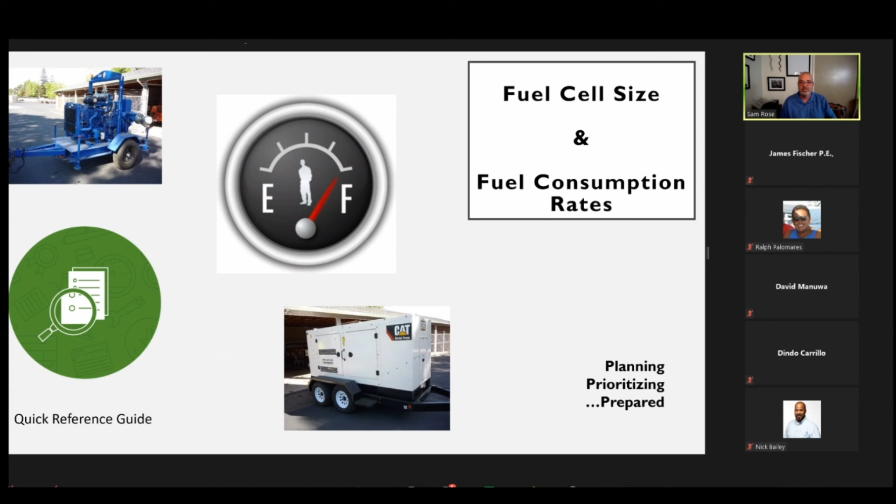We did the same with the fuel cell sizes on our equipment and the consumption rates. We have this all down in quick reference guides, so we know which pieces of equipment can run longer before they need our attention, and that we need to shuttle fuel to them. Or better yet, I don't need to worry about the so-and-so generator because that thing will run for a day on the fuel that it has—I'm going to go someplace else. So again, planning, prioritizing, and being prepared.

So I'm coming back to that section when we did the tabletop exercise. We originally thought using the Hydrovac that we could decant these three pump stations by going from 8 to 7 to 3, back to 8, and we were going to go around like this. But when we were doing the tabletop exercise, we weren't in total consensus about how this would work, or even if it would work. So what we did is we developed a time and motion study. This is just a quick glance, I won't get into it, but you design your time and motion study, and it's kind of like a standard operating procedure. You say exactly what you're going to do, where you're going to go, and how you're going to decant, where you're going to shuttle—all these things.

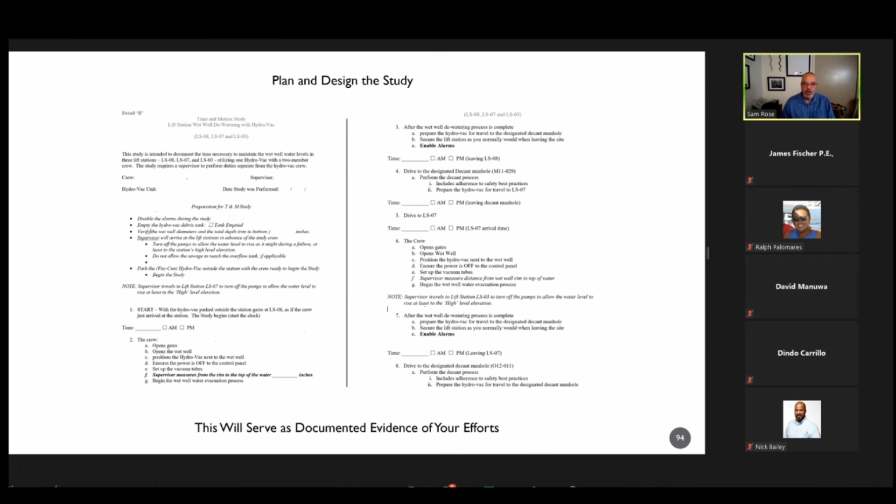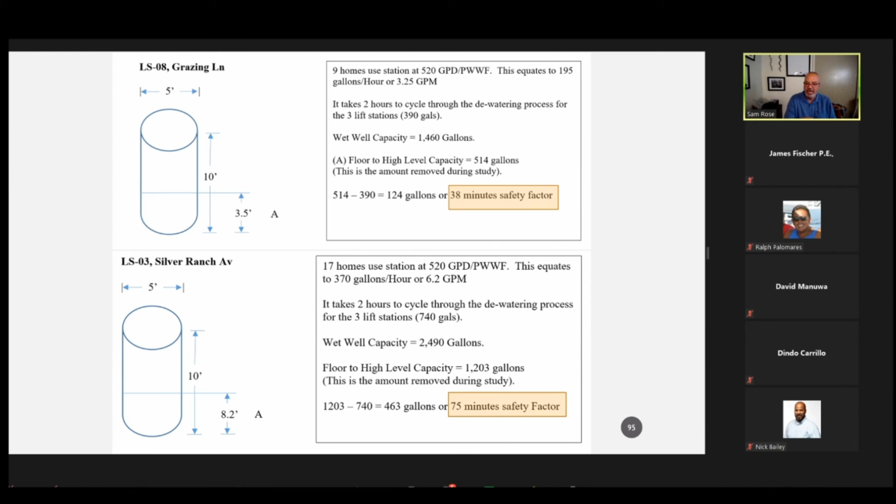So you develop your study. But what we learned on this was Station 8, by the time you left it and came back to it, we were solid—we had a 38-minute safety factor, so we were looking good. Station 3, we had a 75-minute safety factor, so once we pumped it down and came back to it again, we had 75 minutes of extra time. But Station 7, we actually had a 21-minute deficit. This is real fortunate on our part that we did this study prior to actually having to put this into play.

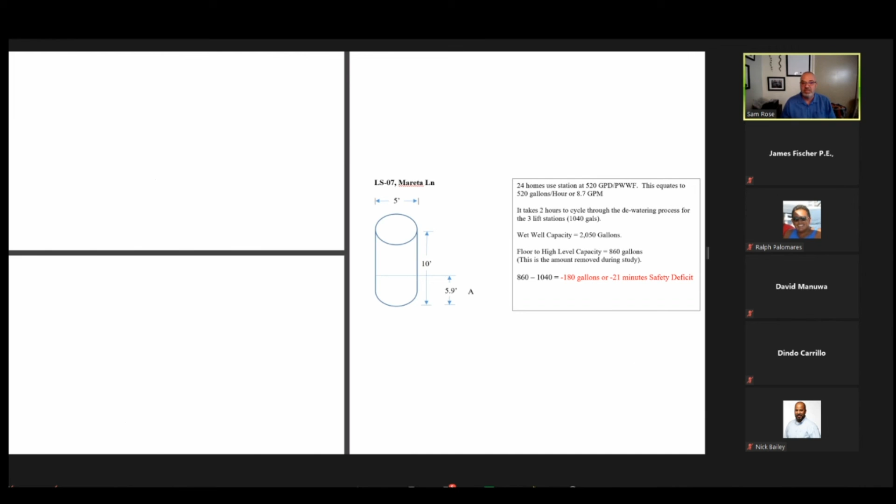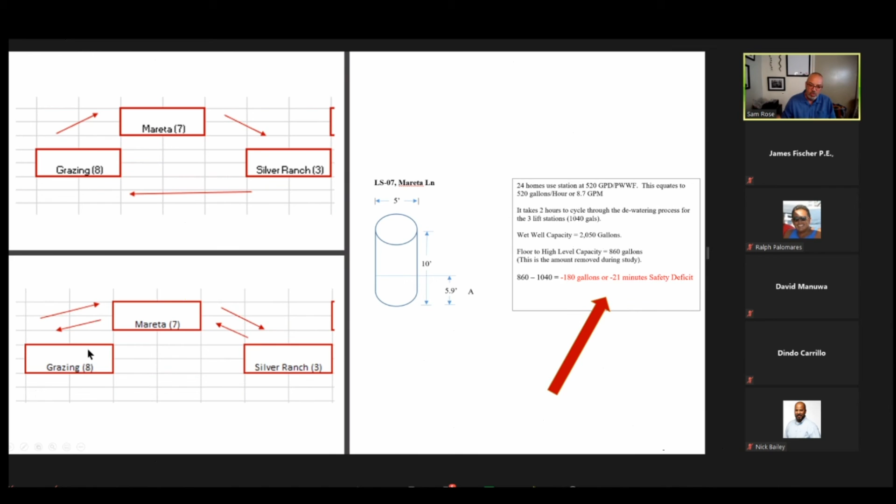We tested it one more time, and it worked no problem. Now we know. Again, these things seem like they take a lot of time, and some of them do, but you do them once and now you know.

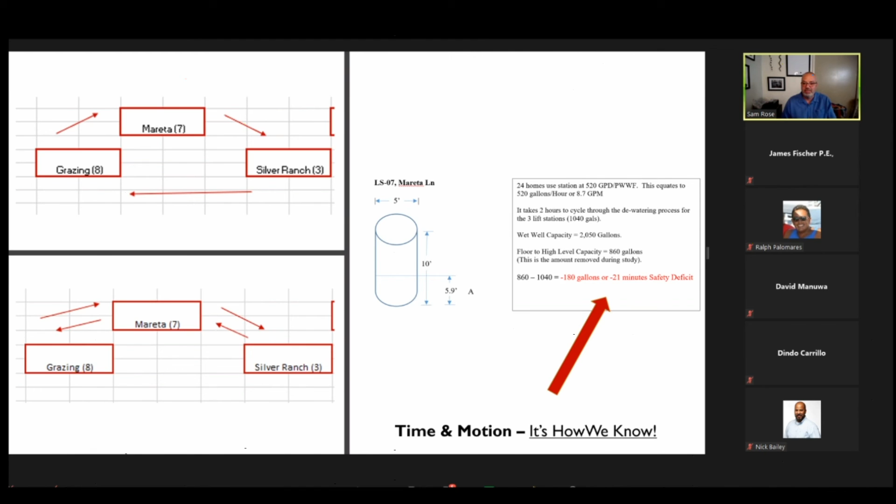In my neck of the woods, we had problems a lot of times with beavers. The stream turns into a pond, and part of our easement road is underwater. So we always kept a truck and transfer load of 7-inch fractured stone at our yard. This helped us bridge wet areas that were pumping on the way in. You can combine the fractured stone and trench plate to help displace the pressure and make it easier to get across. It's a good solution.

This isn't something we did, but we've always maintained some large diameter, 15 to 18-inch diameter ductile iron pipe. It's no good to us from a sewer standpoint, but we have room in the yard to store it, so we've kept it for culverts. If you have a localized area that washes out and you can't get through it, you can construct a bridge pretty quickly.

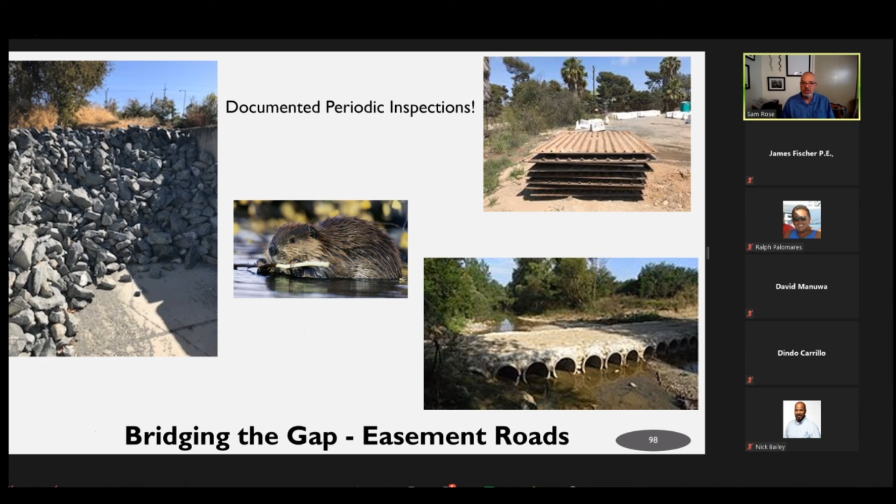These are just some examples of the possible instances we have to deal with, but they're not very likely. So again, document your periodic inspections of your easements. Hopefully you're doing that. When the water board comes and asks what you were doing before the SSO occurred, you want to make sure you can demonstrate your diligence.

As we get close to wrapping up, I mentioned this earlier: mitigation. Our plans don't always work, so what's our fallback plan? If I can't bypass something, how am I going to contain it? If plan A fails, what are your mitigation measures?

Just a suggestion from my experience: if you include these triggers in your OERP for your responders to know—okay, I've tried for this long, I'm getting nowhere—then they can drop back to their plan B.

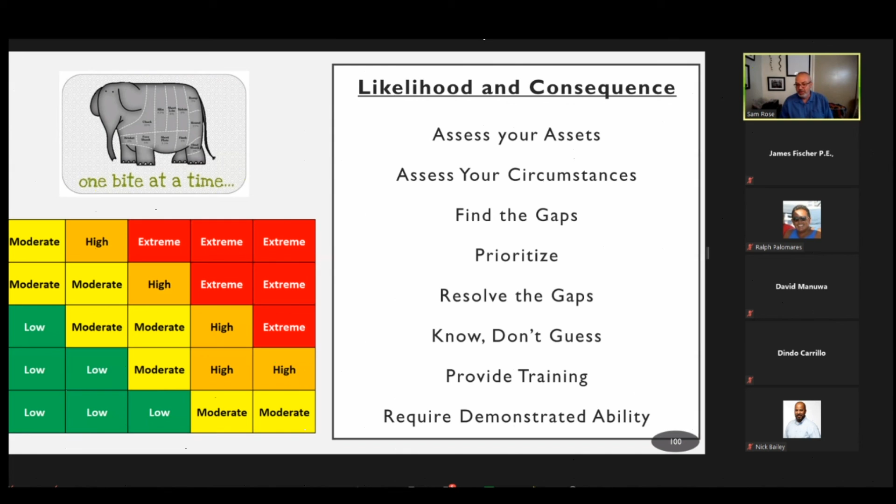Very important: provide training to your personnel. Anytime you provide training, I think it's important to require demonstrated ability, so you know this person can do this task because of it.

One last thing before we go: there's a lot going on here, and the old adage asks, how do you eat an elephant? The answer is one bite at a time. This is how you approach it. Once you identify some shortcomings or areas you'd like to improve, start tackling them.